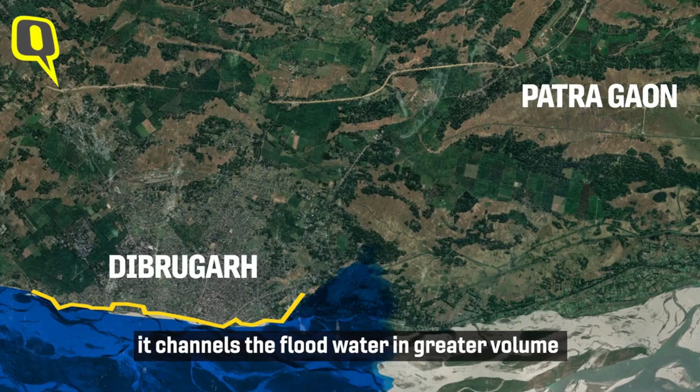Every year during monsoon, Assam faces recurring floods, due to which thousands of families are displaced. In a small town like Dibrugarh in Assam, government schools are often used as shelters every year during the monsoons. So, how can a school transform into a shelter in crisis?

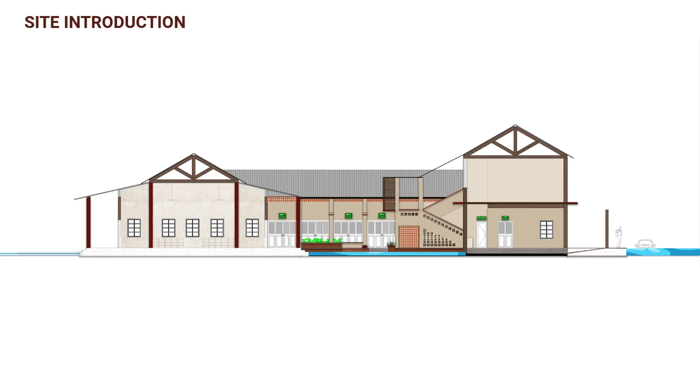This dual role of school and shelter led to the beginning of my project, Vidyangan, an angan of learning and shelter. Vidyangan reimagines a 100-year-old heritage school located in one of the most flood prone regions in Dibrugarh, Assam. The school holds deep cultural value with regional Assamese construction techniques along with adaptation of architectural elements of Vishwa Bharati Shantiniketan in Kolkata.

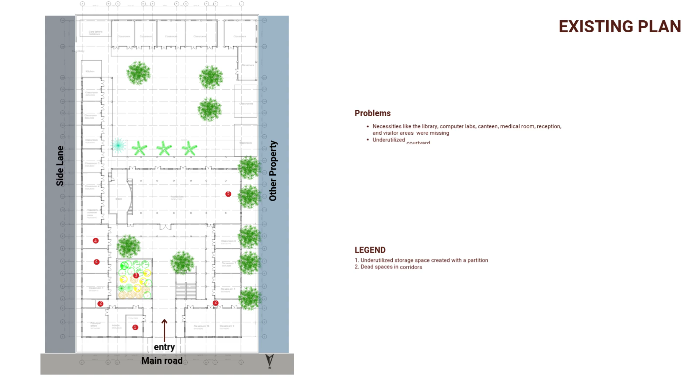The school being on a higher plinth level than the road helps prevent the space from flooding during the monsoons. The existing plan has both strengths and weaknesses. The strengths are the presence of a courtyard, higher ceilings in classrooms, and opportunity for natural air circulation. The weaknesses are basic necessities missing, like a library, reception, computer lab, etc. Out of 25 classrooms, only 12 are being officially used.

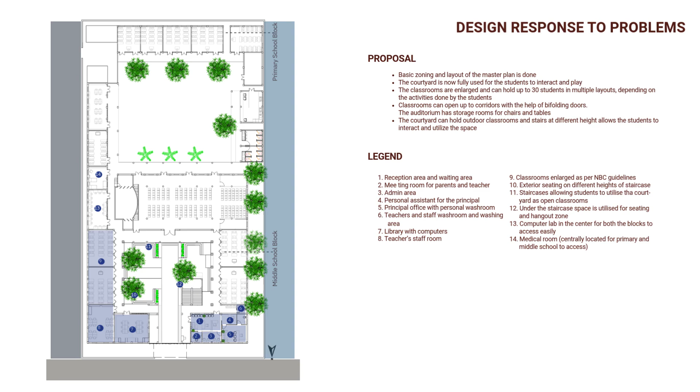The design response to the existing problems is that basic necessities are provided, like designated reception area, library, computer lab, etc. There's proper utilization of the courtyard and improved circulation compared to the existing circulation. Strategies considered while designing the master plan were spatial flexibility, transformable furniture, and dual use zoning.

My area of intervention is the middle school wing, where learning is not limited within the classrooms. Middle school students are in a transitional phase and they learn better by collaboration, interaction, and group activities, as stated by the National Education Policy 2020.

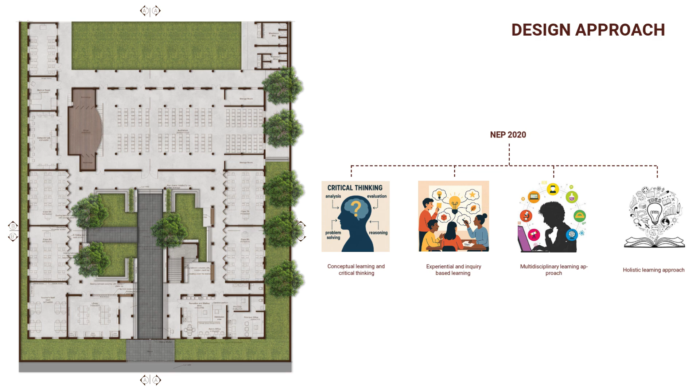The climate in Dibrugarh is hot, humid, and heavily rainfall driven. The courtyard helps create a microclimate. The louvered doors bring in more natural light and help in passive ventilation.

The roofing is divided into three parts. The topmost is the GI sheet roofing, fixed to the timber frame ceiling, which is further covered by the bamboo mat frame ceiling, allowing hot air to pass through the perforations of the bamboo mat.

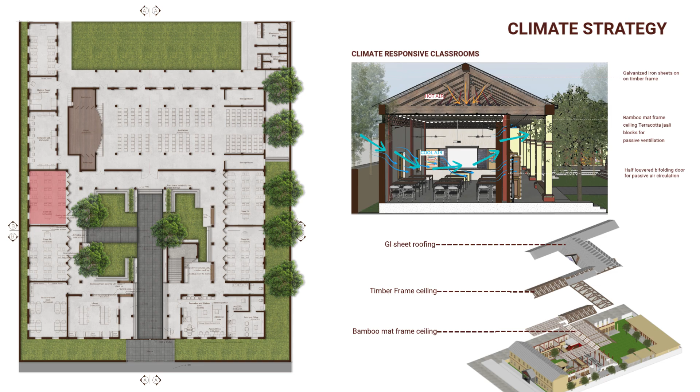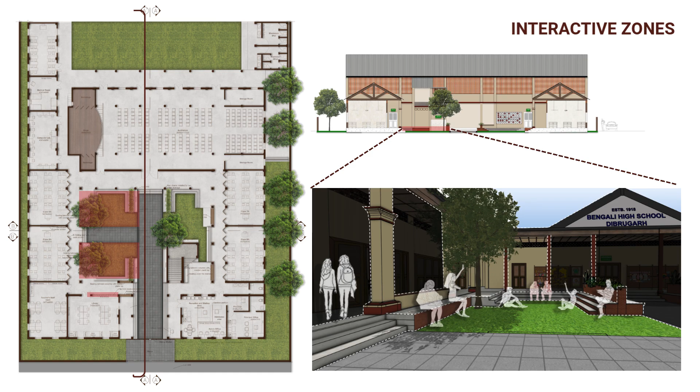The middle school wing is divided into multiple interactive zones. The crossword installation area helps students engage, collaborate, and interact, which helps in their cognitive development. The outdoor step-up seatings in the courtyard help in conducting outdoor classes. The corridor also becomes an interaction point apart from being a transition to the courtyard.

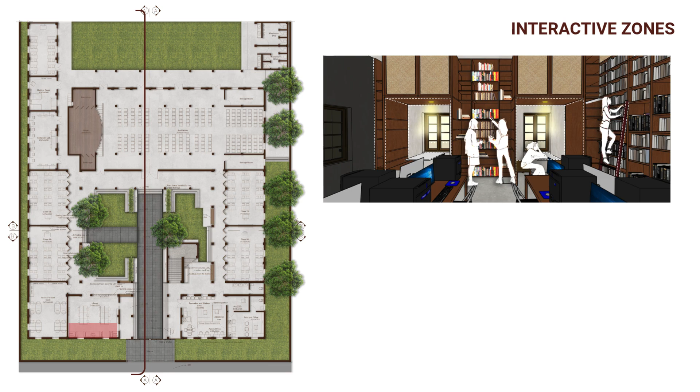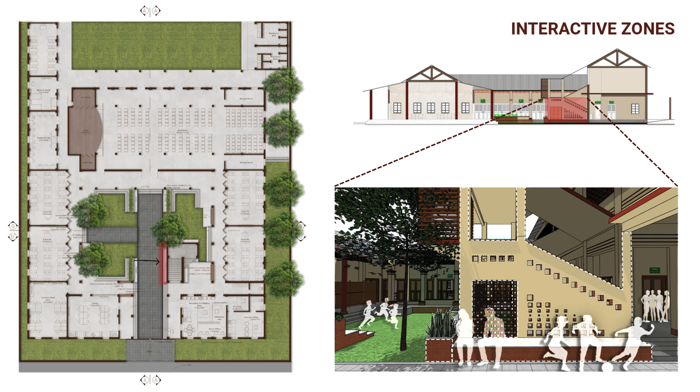The Learning Resource Center has quiet reading nooks, which help students study in a quiet corner. The existing staircase becomes an interacting element where students on the other side can interact through the terracotta jaalis. The space below the first flight of the staircase is an interactive zone for students to discuss their study materials, with a blackboard where they can write and discuss.

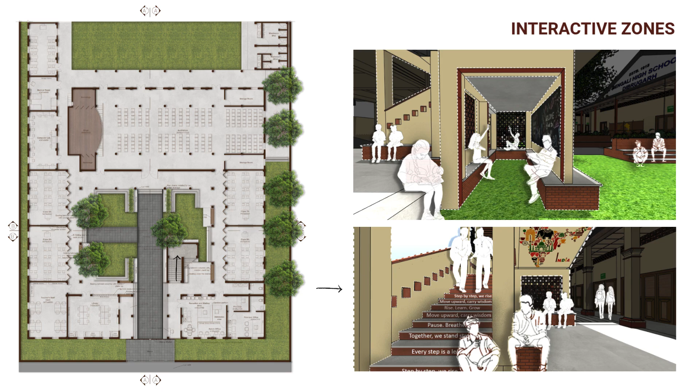The staircase leads to the high school wing, which also has quotes on every step for visual interaction. There are bamboo-weaved panels which allow students to display their work, encouraging group activities and collaboration.

The primary material is bamboo, the most available material for construction in Assam. Bamboo mats are used in partitions and false ceilings. Terracotta jaalis are used for ventilation. The color palette is derived from Vishwa Bharati Shantiniketan and also the existing site.

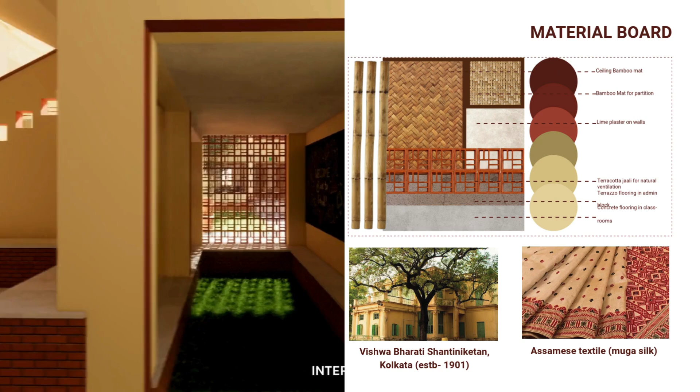It is also derived from the famous Assamese textile called Muga silk. The auditorium has Assamese cultural motifs and Bengali motifs for cultural representation within the space.

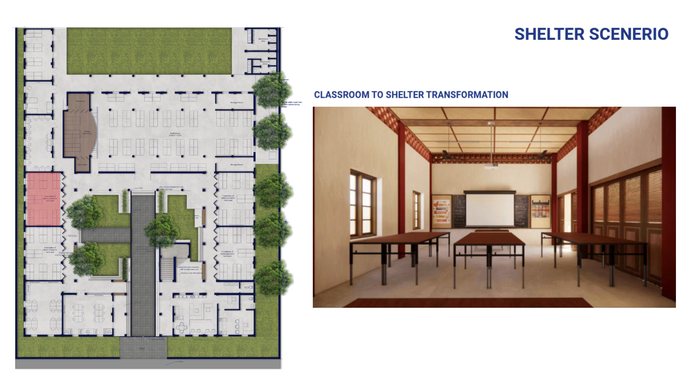Every year during monsoon, the school is transformed into a shelter. Classrooms are transformed into sleeping zones which cater up to 7 beds per class. The tables used during school hours have telescopic legs which are joined together in 4 modules to form a single bed when slid down. The dimensions of the modules together can accommodate 2 people per bed.

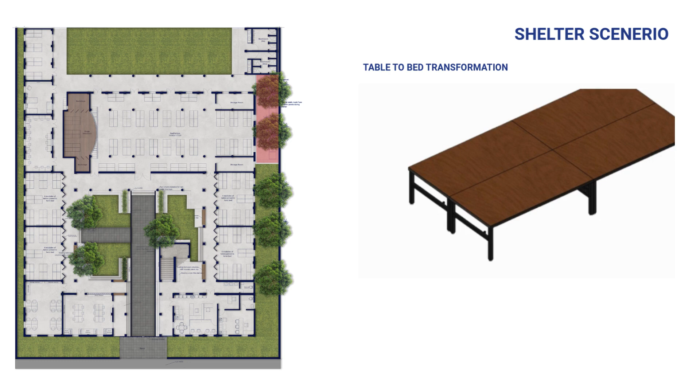The bamboo-weaved panels used during school hours for display are also used as shower stalls during shelter use, when folded. The weaving is done with polypropylene rope, which is waterproof. The bathing shed above the stalls is constructed with a bamboo frame with GI sheets sloping for rainwater to slide downwards.

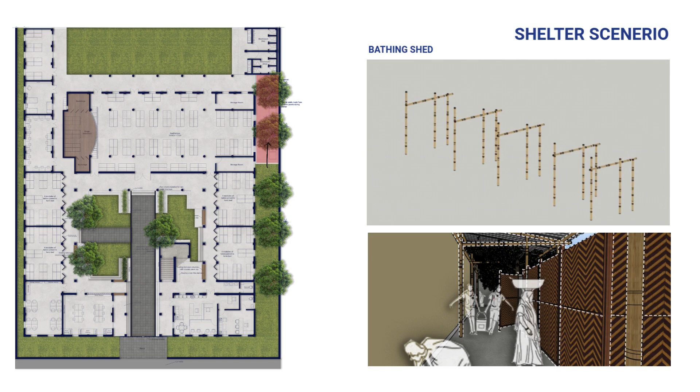There are sleeping beds in classrooms and the auditorium, accommodating up to 63 beds in the middle school wing. There is a designated food distribution area, and food is usually distributed by NGOs.

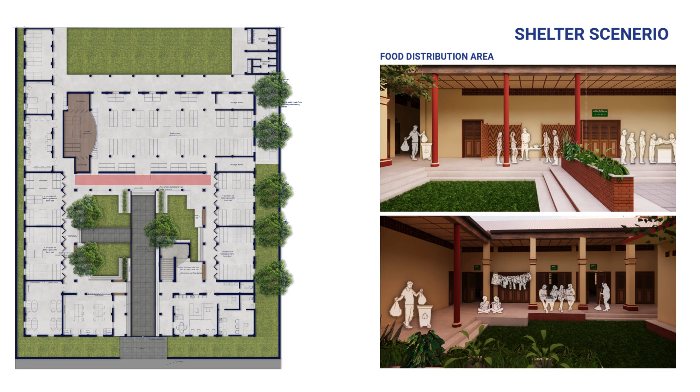So what begins as a school seamlessly transforms into a shelter during floods every year. Therefore, Vidyangan is a proposal where the project respects the heritage of the institution, responds to its climate, and redefines both learning and shelter in one framework.